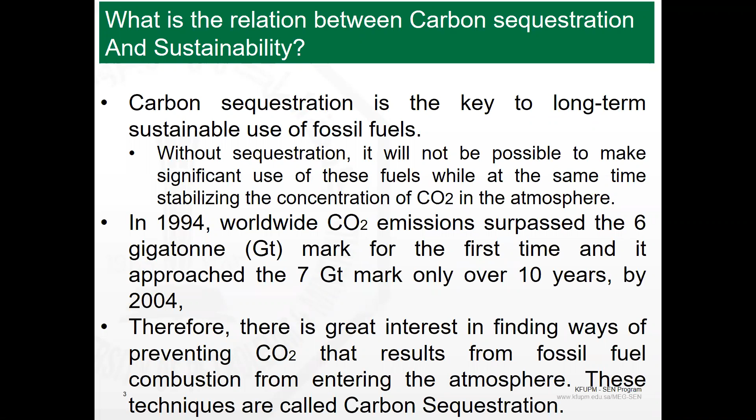So to have your power generation clean, or emission free, there are ways to help you burn fossil fuel and clean your exhaust. One of these ways is carbon sequestration, or separating carbon dioxide from the exhaust and storing it somewhere. We have two main categories for carbon sequestration.

One is direct or active sequestration. This is whatever humans can control to separate CO2 from the exhaust. If you burn a fuel with air, we have mainly nitrogen in the exhaust, plus CO2 and some water vapor. So how do we get rid of the rest to have CO2 alone? Because we need to compress the CO2 and dump it under the ground or somewhere.

This will consume energy, so I don't want to sequestrate nitrogen. Nitrogen is not harmful, it's part of the normal atmosphere. Why should I take all the exhaust, while most of it is nitrogen, and pay the energy to compress and sequestrate it in the ground, in reservoirs, as we will discuss? So separation is important. It will use some energy, but it will save the compression energy at the end.

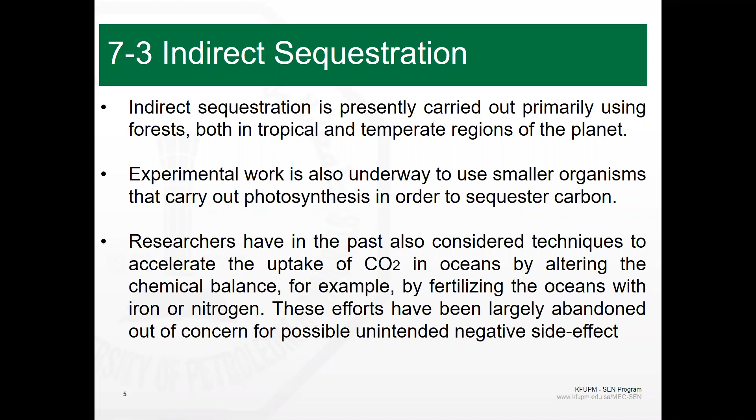For example, fertilizing the ocean by putting in iron or nitrogen, so when they put the CO2 in, it can react. But this alters the biological scene in the ocean, and because it has negative effects on marine life, they are stopping it or trying to find safer ways.

But forest-based sequestration is what someone was asking about. Now, if we produce more CO2, you can pay countries in Africa or places where you have forests, like Brazil, to help grow more forest to absorb CO2. I think this is going on in the US especially.

So forest-based sequestration can be carried out using afforestation, planting new forests. Especially over the last few decades, many forests have been deteriorated, cut, or removed for planting or normal agriculture. So what happened is you need to plant more forests, and this will cost you some money and also some energy, because you need to use fuel for transportation and preparing the land, and for plantation of large lands you will use some energy.

You might burn some fossil fuel to run your vehicles or so. So at the end, if you have a project for forestation, you need to see what is the net CO2 sequestration, because the plants will take time while you take care of them until they grow and become mature.

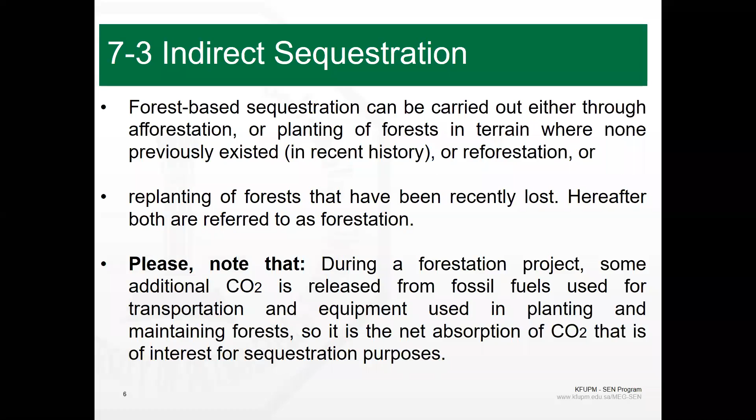All this time it is absorbing CO2, but still you are paying some effort and using transportation, producing also CO2. So the net calculation of CO2, how much this forest will sequestrate CO2, and how much you burn fuel and produce CO2, you as a project manager or a team have to calculate the net CO2 absorption to see how much is saved.

Actually, photosynthesis, this process, we learn about it since prep years and primary years in our schools. We know that plants take light and use the energy in the light to make a chemical reaction: you take CO2 plus H2O from the ground, some energy from the light, and the plant produces glucose, C6H12O6, plus some oxygen. This is the chemical energy balance equation.

So how much energy is needed by the plant to produce, or to absorb, 1 molecule of CO2? Let us see the numbers. The numbers here are from your book: it's about 9.5 times 10 to the power minus 19 joule per molecule of CO2. You might look at this number and find it very small to absorb 1 molecule of CO2.

Actually, if you look at how much energy comes from the sunlight incident on the Earth every day, you'll find it's a huge number.

But why is not all the CO2 produced by human activity absorbed by the forest or by the plants? Because there are many reasons, let me list some. Plant leaves absorb only light waves in the visible light range. The infrared or ultraviolet waves, which also have energy, are not absorbed by the plant's leaves. Also, the surface of the plant or whatever green area you have, that you are hoping will absorb the CO2 around it, is not uniform, it has ups and downs. Also, leaves are not organized in a uniform way, so most of the light actually goes to the ground instead of hitting the leaves or being absorbed by them, and most of it is reflected far away. So we don't capture much of this energy in the light.

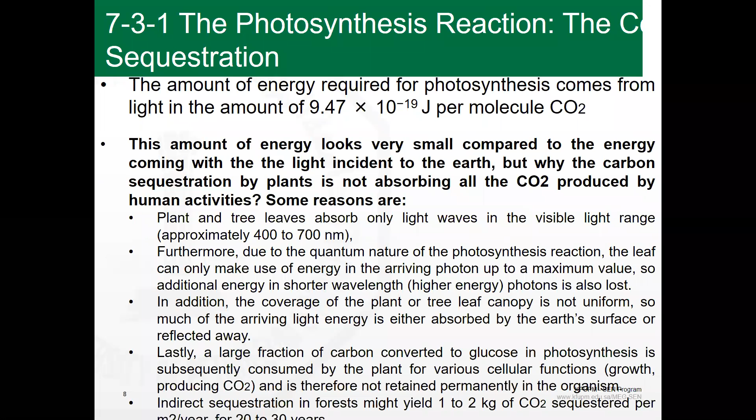Okay, so we need to know, as we sit here, each molecule of CO2 to absorb it, you need 9.47 times 10 to the power minus 19 joule per molecule. So if we have 2 kilograms of CO2, how many molecules does it have? We know that by volume, 1 mole has Avogadro's number of molecules, which is 6.022 times 10 to the power 23 molecules.

But we need to know in 2 kilograms how many moles we have. So we divide the 2 kilogram, this mass, by the atomic number of CO2, which is 44. You know how to calculate the atomic number for any chemical composition like CO2. We have C, it has 12 atomic number, and oxygen has 16. So O2 means 2 times 16 is 32, plus 12 for carbon, then it is 44 gram per gram mole, or kilogram per kilomole.

Then 2 kilogram divided by 44, how much moles we have, and then we multiply by Avogadro's number to give us the number of molecules we have. Then if we have this number of moles at 2.74 times 10 to the power 25 molecules, then we multiply by the energy required for 1 molecule of CO2 to absorb. It gives us 2.59 times 10 to the power 7 joule, or 25.9 megajoule. This is to absorb the 2 kilogram per year.

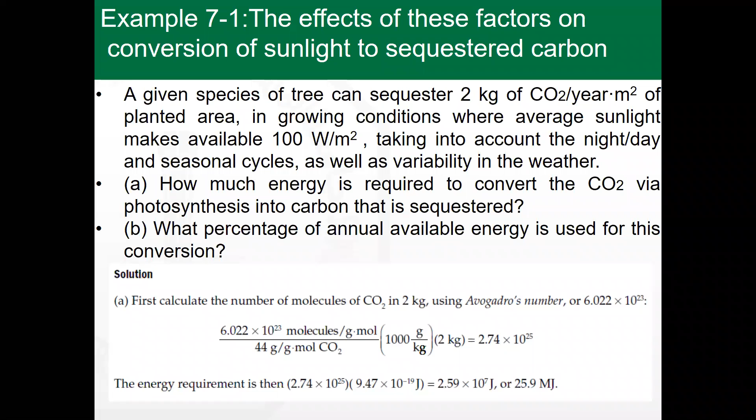To absorb the 2 kilogram per year, you need 25.9 megajoule. But how much energy comes to you per year? We have 100 watt per meter square, assume we are going to take, but we have per year, because this is the average per meter square. The average means he takes day and night, he takes the average. We know that half of the day we don't have sun, but he is giving the average number, that 100 watt per meter square. So we'll see how many joules per meter square. We multiply by the hour, which is 3,600 seconds per hour, and multiplied by how many hours per year.

It is 8,760 hours per year. So per year you have the incident radiation from light about 3.15 times 10 to the power 9 joule per year coming energy. But you need only from it 25.9 megajoule. We divide the numbers. So this sequestration of 2 kilogram of CO2 by these trees per year is 0.8%.

Hello? Hello? Any question? So if you are talking something outside the class, please mute yourself.

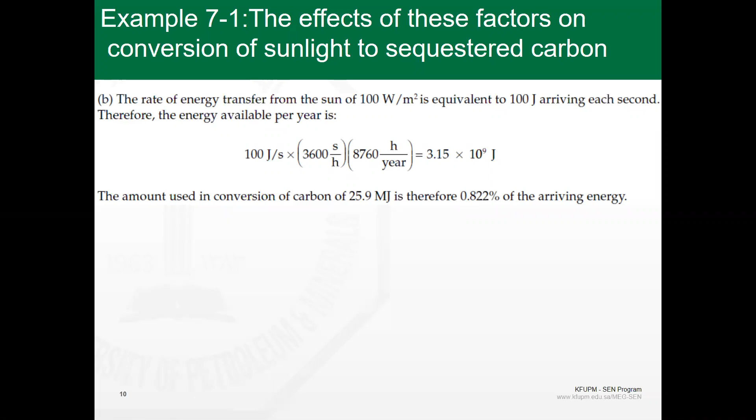Yes, Doctor. Yes. So this tree is utilizing less than 1% of the light coming to it.

As we know, this indirect sequestration, or helping planting the forest, is now being forced by government seeking to meet carbon emission reduction, and the non-governmental organizations that help or administer forestation on behalf of institutional and individual.

So the cost actually, if you already have a forest, might be $1 per ton of CO2 sequestration. But if you are going to plant the forest yourself and spend more money on it, then the rate is $20 to $30 per ton, which is really on the low side to sequestrate 1,000 kilogram of CO2. You need between let us say $1 and $30. This is still on the cheap side.

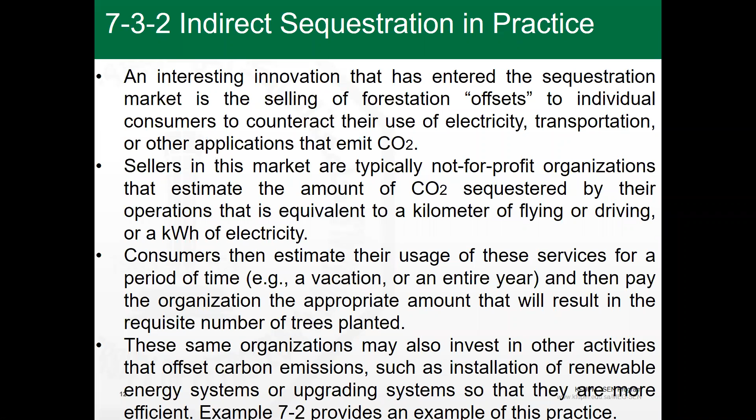This next example, example 7.2 in your book, gives an idea of a family that produces 400 kilowatt hour per month of electricity and wishes to buy sequestration offset from an organization that plants trees in Africa. The organization charges $19 per tree to plant it, and estimates that each tree will, on average, absorb about 730 kilogram of CO2 over its lifetime, which is about 20 years.

Electricity consumed emits CO2 at the New York State average rate based on the energy mix, classified around 2003. Given there is a table that depends on what fuel you are using, what source of energy, then we can estimate how much CO2 is produced per kilowatt hour.

So if this family is consuming 400 kilowatt hour, what is the CO2 emission for each kilowatt hour they are consuming? The organization allows consumers to purchase a fraction of a tree, like 2.5 or 1.5, so it's okay — they pay money, they don't really buy a whole tree. How much must the family spend to offset emission of 1 year?

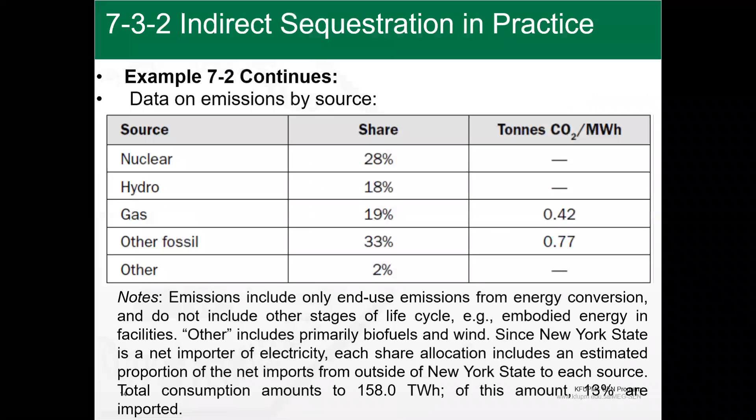But we are using annual consumption of 400 kilowatt hour per month — this is the question. 400 kilowatt per month, we multiply this by 12, so it will be 4,800 kilowatt hour per year, or 4.8 megawatt hour per year. Then the amount of electricity that produces CO2: we have 0.33 ton of CO2 per megawatt hour, and we are consuming 4.8, so multiply these two numbers, giving us 1.6 ton emitted per year.

So 1.6 ton — how much is the tree absorbing per year? It is 0.73 ton of CO2 during its lifetime, over its lifetime of 20 years. So if we are producing, this is what we are producing, 1.6 ton emitted.

So we divide 1.6 ton by 0.73, and we got 2.2, so we need 2.2 trees. Each tree costs $19. So we have to pay this to the country in Africa through the organization that is stated in New York, which comes to $41.68.

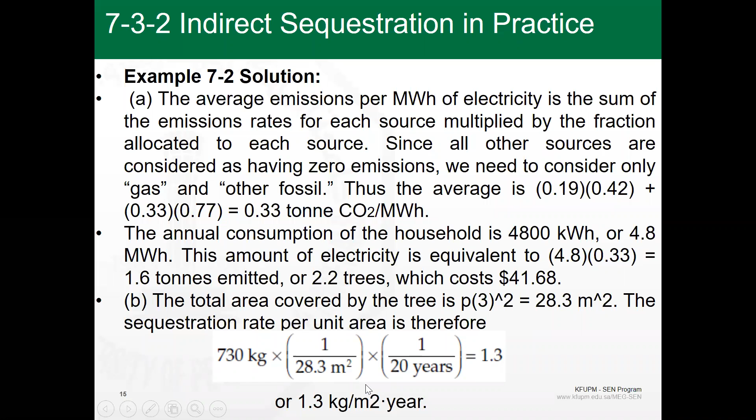So I divide by 20. So if I need it per meter squared, I divide by the area, or outer area, which he said covers the projected area. It has a diameter of 6 meters - this is of course the imaginary diameter, as if it is cylindrical in shape or a circle. So this shows how many kilograms of CO2 per meter squared per year is absorbed by this type of tree I will buy in Africa to offset my contribution to CO2 emission.

Now, for this indirect sequestration by planting trees, what is the future of it? To wrap up and summarize, it is clear that indirect sequestration is a straightforward, economically viable option for sequestration.

Even if your country doesn't have forest, you can help another country. I think with time, because the globe is becoming like one village and we are affecting each other, especially with emissions, it's not limited to one country. I remember maybe 10, 15 years back, Europe was thinking to buy electricity from the Middle East instead of buying the fuel and burning it in their own power plants, through connecting the electric grid.

So if, for example, we produce electricity here because we have fuel, and then export the electricity, this doesn't prevent the emission that goes to Europe, because it's produced here but spreads everywhere, right? So there are some challenges. The world now should help each other. This is what I want to say from that example.

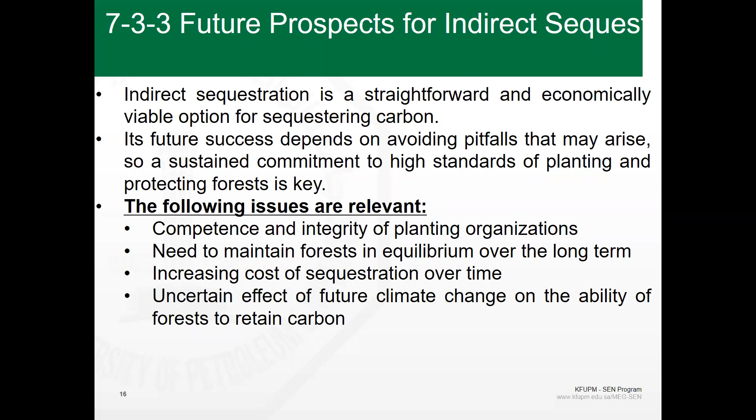These debatable things are not clear because it needs research - you need to record data. Before our current time, we don't have enough data recorded to trace this. I will stop here for the first session, and I would like to see if you have any questions.

Otherwise, I'll start this. Yes, please.

Yeah, last sessions we took some thermodynamics lessons, the Brayton cycle and Rankine cycle. So now we jump to carbon sequestration, which... We didn't jump. Actually, last time we talked about combustion techniques that will help us to separate the CO2 because, as I said, your main program is sustainable energy, right? That's why we have this course that talks about sustainability from different angles.

One is increasing the efficiency of the production or conversion of energy from conventional power plants, where more than 80% of the power produced is from fossil fuel. I mean, here in Saudi Arabia, so far it is almost 100%. You produce energy from burning natural gas and oil, isn't it? So we cannot focus now on renewable energy. Of course, we are preparing you for the future, but nowadays you have to do something with what is on the ground.

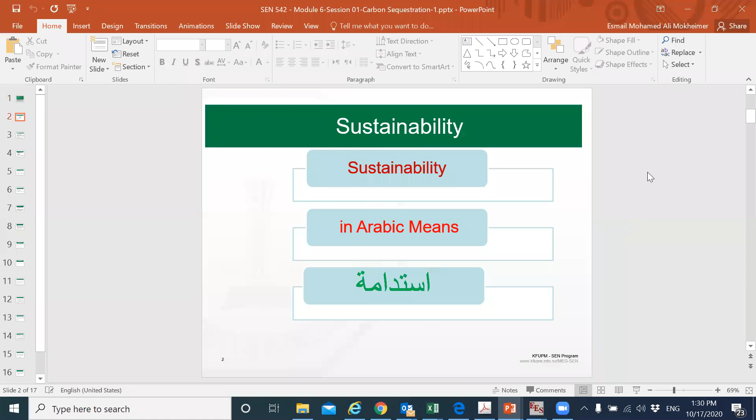And at the beginning of this lecture, I don't know who asked the question, did he come late? I put this here: what is the relation between carbon sequestration and sustainability? I started my lecture with this. Were you here when we started? Because your question was related to this slide actually. Did you come late? Who asked? No, I was. Can you please clarify your question more, because I didn't get the question.

I think from my side the relation between the topic we are discussing and power plants is clear, because mainly we burn fuel there. And also this is my research, in line with my master's and PhD students. So the relation is very clear in my mind, but I want to understand your question more to see where you are from the picture I have. Can you please repeat the question or rephrase it?

Yeah, Doctor, you clarified it, but my question arose because we take this course as part of mechanical, then we talk about carbon sequestration, which is a technique. So that raises some questions from my side about the exam. Will this part also be in the exam? Yes, at least if you are worried about the exam, maybe I will give a short essay question, or a question like the one we discussed about the offset of CO2, or how much CO2 is absorbed by a tree or something.

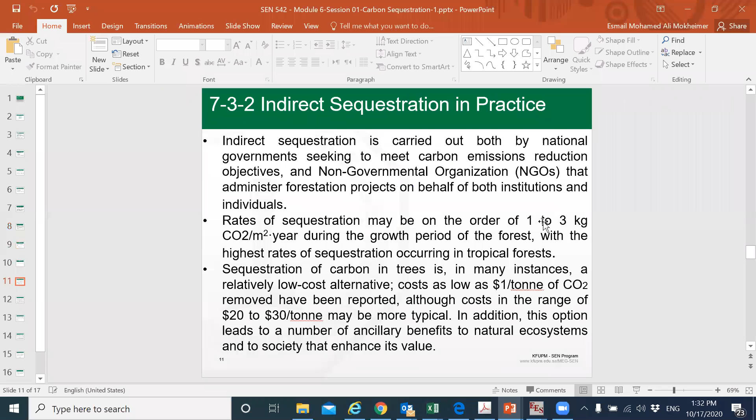This type of example 1 and 2 might be a point, but this is not the only issue. We are talking about different ways to make the combustion clean, right? Or the power plant environmentally friendly. Why do I want my power plant environmentally friendly? To make the country leave my power plant in operation, yes, right? Otherwise they will shut down my plant if I am exceeding the limits, or I will pay more taxes that will reduce my profits, right?

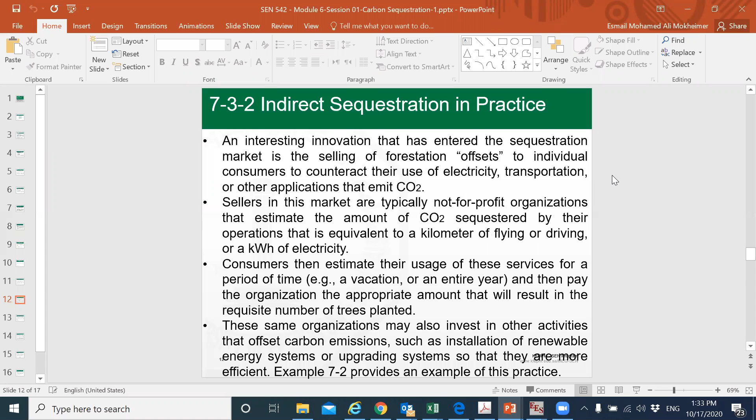But as a country, we are responsible now for our globe, aren't we? We are responsible for the problems that affect not only my country, but other countries, right? We are affecting each other, as I said. Yes, yes. So these types of questions are important.

But again, I said at the beginning of each lecture, I will try to make a link between what we are discussing and the main objective of your master program. It is sustainability. Of course, even the program now is sustainability and renewable energy. I'm not sure if it is the official name now. We discussed earlier changing the name to sustainable energy only. Now it is sustainable and renewable energy, both.

Because introducing renewables is part of the contribution to sustain our source of energy, to make it continue for a longer time for us to use it. That's why, first of all, we use it efficiently, and using it efficiently also helps us use it in an environmentally friendly way.

We have attended with you, and this is the third session and one office hour. Yeah, of course, I'm willing. Actually, the first office hour I think we delayed because you were preparing for your exam with Dr. Hunter, but I'm willing to give any office hour you want. I am free. I have more time now, alhamdulillah. So at any time, but the first one in the first week, you remember, we had an exam. It was delayed because of the exam, not because of me.

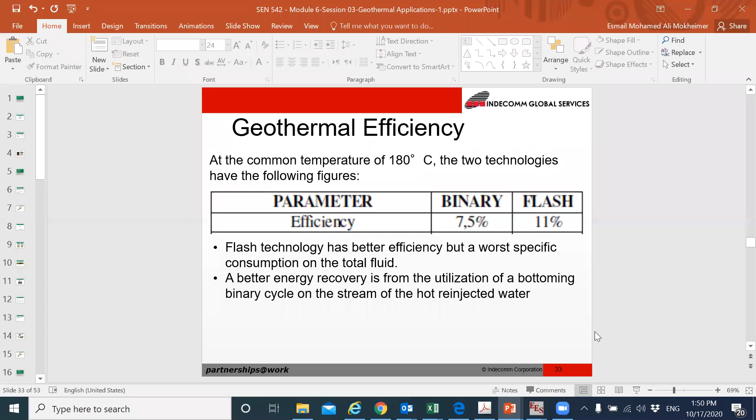Yes, Doctor. Yes. Actually, this is again a continuation of carbon capture. This will close the issue of, I think, conventional power plants, because we are going to start, in the third session, the renewable energy part. Before I go to this, actually the questions you are raising, like what is the relation between what we are discussing and sustainability or the main program, and also how the elements inside each module are integrated to each other, are also important questions.

Because you need to know, as a master student in that program, what are the main objectives, why these courses are there, how they are helping me. Actually, the global picture is that a graduate of this program should be a leader or decision maker or manager in the energy sector. Maybe after a few months or few years, you will make major decisions that affect your company or affect the country, right? Depending on what your position will be. What we are preparing is an engineer who will be a decision maker in the energy sector.

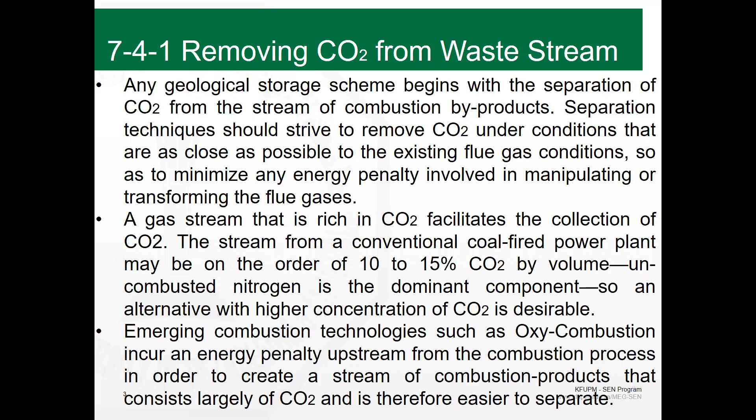Maybe we add CO2 to it, a sort of CO2 circulation. The oxidizer now is a mixture of oxygen plus CO2. Then we burn the hydrocarbon and produce CO2 plus H2O. I can cool the exhaust gases to condense the water, having it liquid, and then I have CO2, which I compress and sequestrate.

These are emerging technologies, but they have a cost, of course, to separate oxygen from the air. With this oxy-combustion, you need to modify your combustion system - you need to add a plant for air separation.

The other way is to leave your plant as it is and add an exhaust gas treatment step. As I said, by chemical looping, you have chemicals that absorb CO2 and leave nitrogen alone, which you get rid of. Then you have the solution with CO2 dissolved in it, and you heat it again to take the CO2 out as a gas. There is no chemical reaction with the liquid - it's just physical dissolving at low temperature and separation at high temperature.

So here you pay some energy circulating the liquid between the two containers, and also in heating the solution of chemical and CO2 - you need to heat it, which costs energy. Also, when you put this system on the exhaust of the gas turbine or combustion chamber, you add a pressure drop or friction resistance that reduces the power output from your plant. So there is always a penalty when you add carbon capture technique.

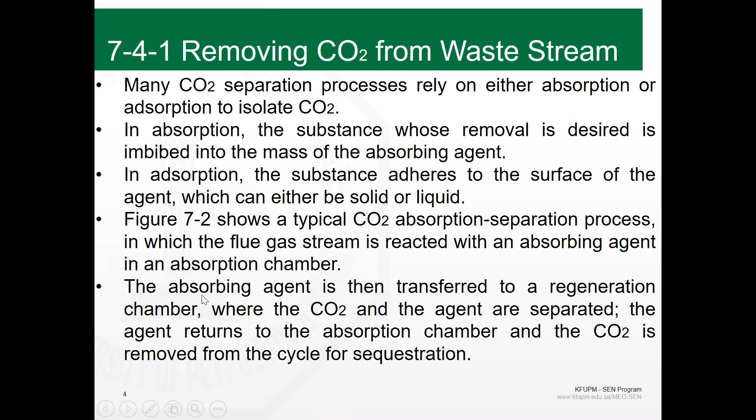Let me show you one of the examples I gave last session. Let us look at it more closely.

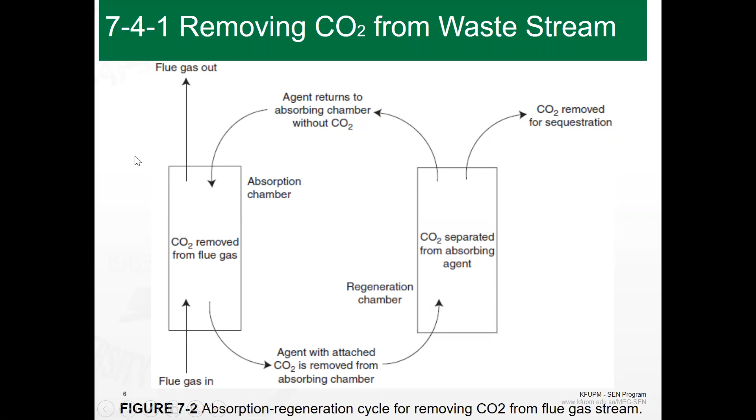Is that a new thing in the plant, or has it been available for a long time? The chemical looping is known for a long time, but nowadays you need to install it. I mean, you need to add it to your plant. If you don't have it, you will add it, right?

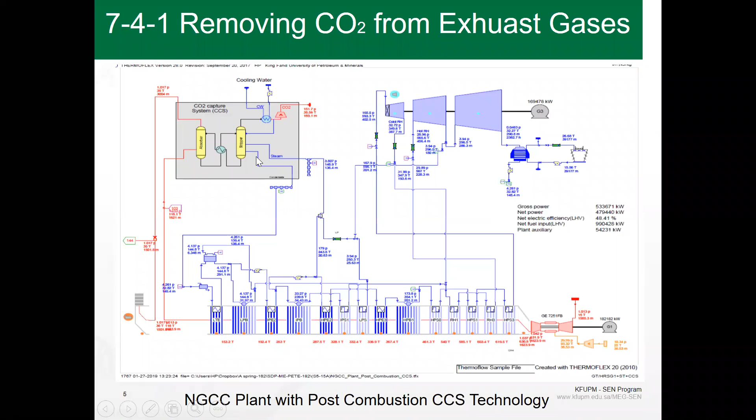Like oxygen separation, the new technology or the other technology we have. This oxygen separation is known for a long time because in all hospitals you have oxygen bottles, right? From where do they get it? From the air. You have a factory, like many factories around us in the eastern province. They compress the air to very high pressure, then cool it to a very low temperature, so it becomes liquid, a mixture of oxygen and nitrogen as liquid.

Now you heat them again slowly, so the nitrogen will boil at a different temperature from the oxygen. You separate them and take the oxygen in a bottle. Maybe you release the nitrogen again, or take it for another industry, like the fertilizer industry. This technology of oxygen separation from air is known for a long time. But now they introduce this into power plants for pre-combustion, to separate CO2.

How is this? When I burn any fuel, which is CxHy, I burn it with air. Air has oxygen and nitrogen, isn't it? In this combustion, CxHy plus oxygen plus nitrogen will give CO2 plus H2O plus nitrogen again, because nitrogen is inert, it doesn't react unless we have NOx. So mainly, you can separate H2O from the product by cooling, as we did, and separate nitrogen.

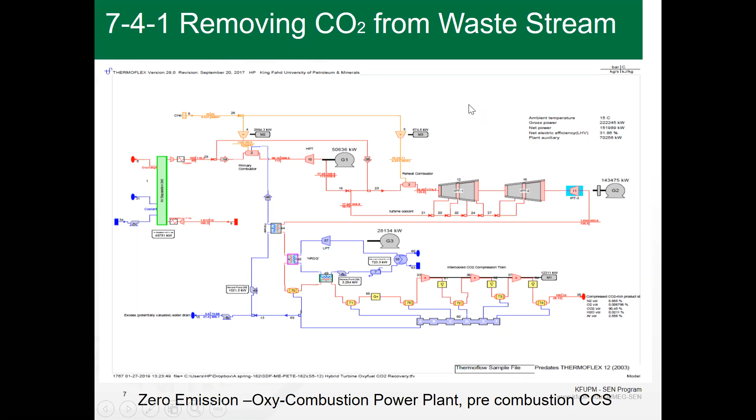There are other ways for direct sequestration. If you have an industrial area with CO2 coming from many chimneys, and a windy place, you can design a sort of duct in which this wind or stream of CO2 plus nitrogen goes into the duct without really needing a compressor for suction. Then you make the separation by chemical looping, and then you need to raise the pressure of the collected CO2 and inject it into the ground, into the reservoir.

What I want to say is, why not take the exhaust directly, all of it? As I said, if I have 100 cubic meters of exhaust gases, maybe 90% or 85% of it will be nitrogen, and the remaining is CO2.

When you compress all this exhaust, you need to pay energy and money, including for the nitrogen that you don't need to store. So it's cheaper to first get rid of the nitrogen, and then you have almost pure CO2. Now you're forced to pay energy to raise its pressure, so you can compress it down under the ground.

Now, some companies or ideas propose using this CO2 since we're trying to store it under the ground anyway - why not use it for enhanced oil recovery? As I told you, maybe in the help session discussion, we have enhanced oil recovery. What does enhanced oil recovery mean?

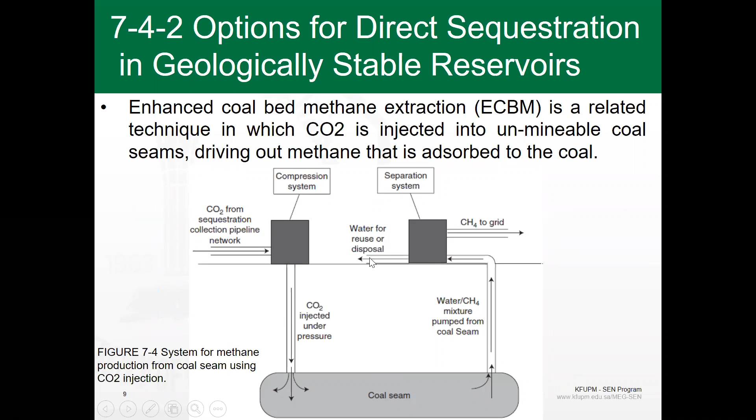These are ideas for how to do sequestration while at the same time producing more fossil fuel. This is used in some places in the US with this technology of enhanced coal bed... reservoirs. You need to just get an idea of how much CO2 you can sequestrate.

You can, here in this reservoir in San Juan, sequestrate up to 1.4 gigaton. So it's huge, but it also has a cost.

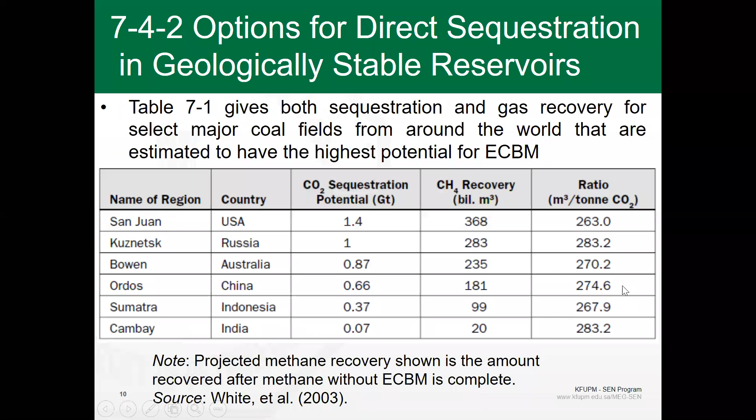The conversion rate of the field is from this table - in Indonesia, this is the sequestration, this is the recovery, and the ratio is 267. We use this to find out how much methane we'll get. This gives us the energy produced from the methane, and at a price of 10.5, the value of the gas output is about 720 million per year.

If you use this CO2 to inject it into a coal mine, you will produce 720 million dollars worth of gas or methane per year. But of course you will pay costs - to transport the CO2 from the power plant to the coal mine and inject it, you need compressors. So you need to see what the net profit is.

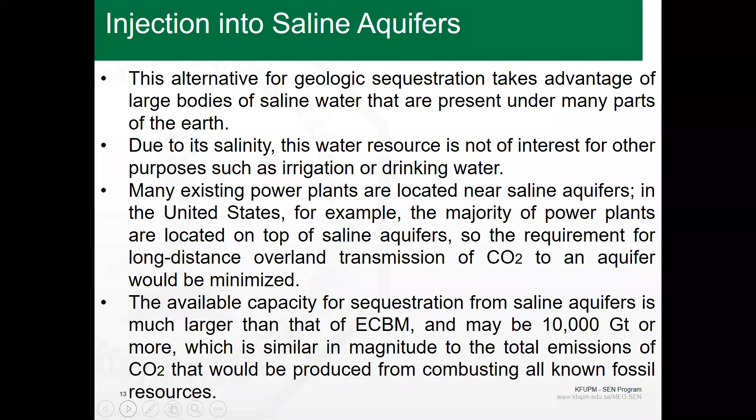Again, injection in saline reservoir: like you inject in these coal mines, you can inject in a saline reservoir. Why in a saline reservoir? Because saline water is underground water that is not useful for irrigation unless you have a desalination plant, and that also will cost you. But let us say in the US, there are many saline reservoirs; they inject CO2 in it, and CO2 reacts with the saline water.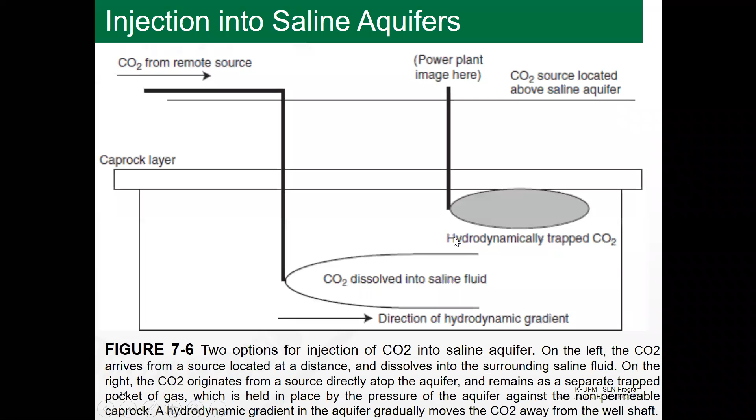Then you will have the CO2 like bubbles, hydrodynamically trapped gas inside. But again, this is the sort of analysis. If you have in the aquifer some porosity phi, and the volume of the aquifer is V, and how much of the water is saturated from previously injected CO2, then this is the volume of CO2 you can inject in that reservoir.

Of course, since CO2 is an ideal gas, we can say number of moles equals PV over RT, and then we can substitute here how many molecules by PV over RT. So just a quick example here.

Sequestration in literature suggests $0.01 per kilowatt hour may be feasible. This example says for the supercritical plant in example 6.8, which is an efficient power plant but also has combustion, you produce CO2. CO2 from 15 such plants is piped to a saline aquifer where it is injected. The aquifer is approximately 1,000 kilometers long, 500 kilometers wide, and average depth of 1,000 meters.

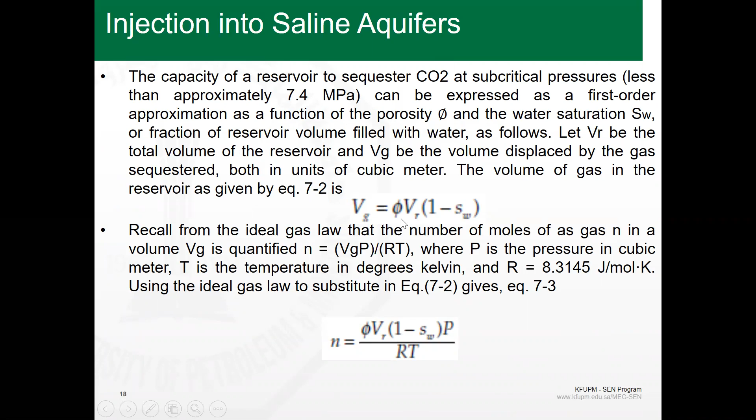And it says the pressure in the aquifer is 500 kilopascal on average, and the temperature is 325. If the plant functions for 75 years, is there sufficient capacity in the aquifer to sequestrate all the CO2?

To answer this question, we need to know the rate of CO2 production from example 6.8. So we refer back to it and get how much megawatt hour is produced per year, and then we translate it to CO2 emission, because we have a relation for how much CO2 is produced per megawatt hour. Then we substitute this CO2 production per year in the equation and get the number of years, using the volume of the tank.

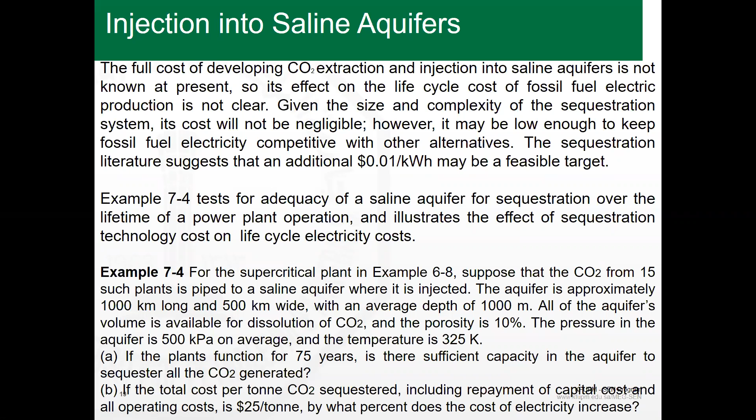Then he's saying if the total cost per ton of CO2 sequestrated, including repayment of capital cost and all costs, is $25 per ton, by what percent does the cost of electricity increase due to sequestration? Because sequestration needs transportation, compression; these are all additional costs.

So the solution: we got the volume of the reservoir, which is 5 times 10 to the power 14 meter cube, times the pressure over RT, times 0.1, the porosity of the reservoir. So you have 9.25 times 10 to the power 15 moles. At 44 grams per gram mole of CO2, this converts to this number of tons.

And from example 6.8, as I said, the plant generates 1.47 million tons per year of CO2. So for the amount of CO2 generated by 15 plants over 75 years, we multiply this number by 15, and then times 75 as well.

Then there is adequate capacity, because you see how much is the volume of the reservoir. And this is the additional cost. If you have how many tons, you multiply this by $25, it gives you the cost, $36 million per year for sequestration. Then spreading this cost among 3.07 billion kilowatt hours generated, then you add this.

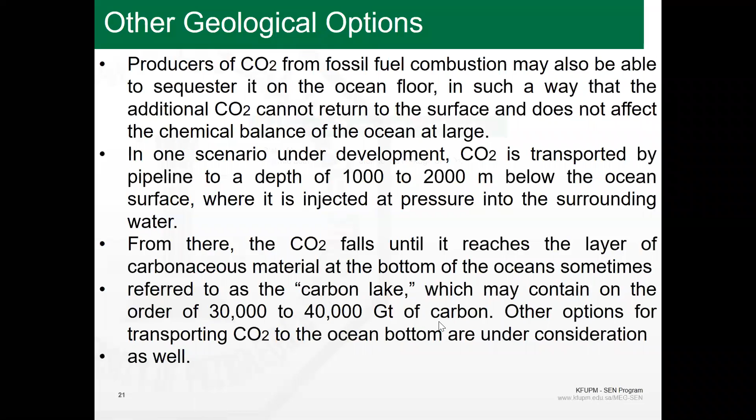So we have this risk always with carbon capture and sequestration underground or under the ocean water, like risk of leakage. If this CO2 leaks back to the surface, it might be in huge amounts, and then we are actually making an adverse effect on our globe. Also seismic activity: when you store mass in a reservoir that is empty, you might create some risk of earthquakes. Then if you have earthquakes, you might have some cracks, and these cracks might lead to leaking of the CO2 you stored.

But also there is an important issue. I think our friends in Earth Science and the Petroleum Department are studying it, because when you inject CO2, even for oil recovery or just for sequestration, this CO2 might react with the material in the cap rock shale of the reservoir. It has a cover from, I think, sandstone material, I don't know the detail, but it can react. Our colleagues are studying how this CO2 will react and how it will affect its strength or ability to sustain earthquakes or something like this.

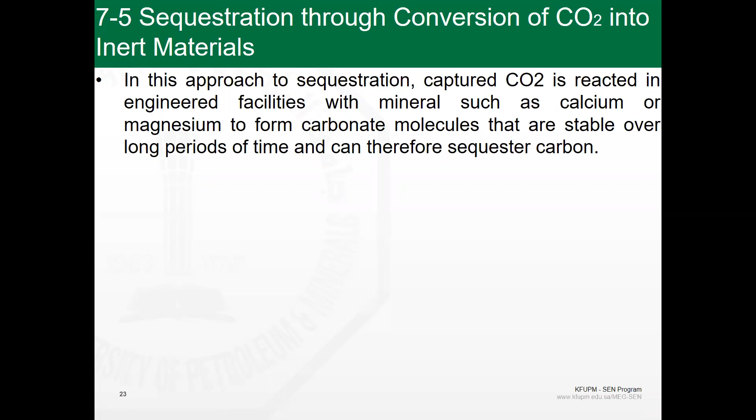Before I leave this, the option is to convert CO2 into a product. SABIC is having some project to convert CO2 into plastics. There are some technologies under development, SABIC is trying to push this. Also, you might convert CO2 into fuel by a process similar to photosynthesis. I think we have Dr. Gondal in the physics department trying to do something like this, to convert CO2 into fuel.

So I will stop here. Again, this is sort of a descriptive lecture, but it has some simple numbers, just to have a rough estimation of the cost due to sequestration, how much if you use indirect by trees, or by chemical looping, or by sequestration in aquifers. This type of question I might integrate in a question to compare this to that, how much is this cost, how much is this cost.

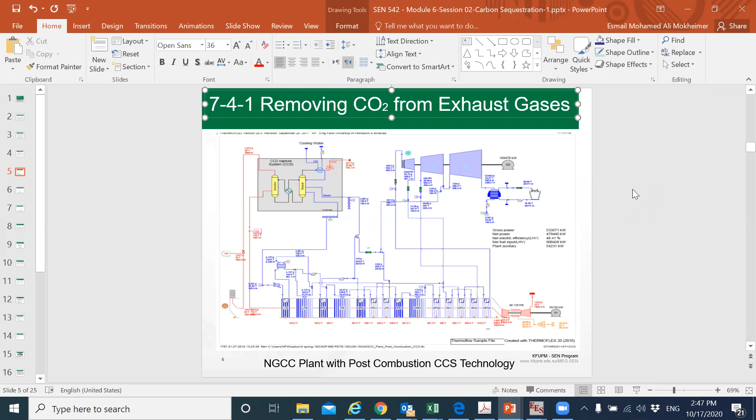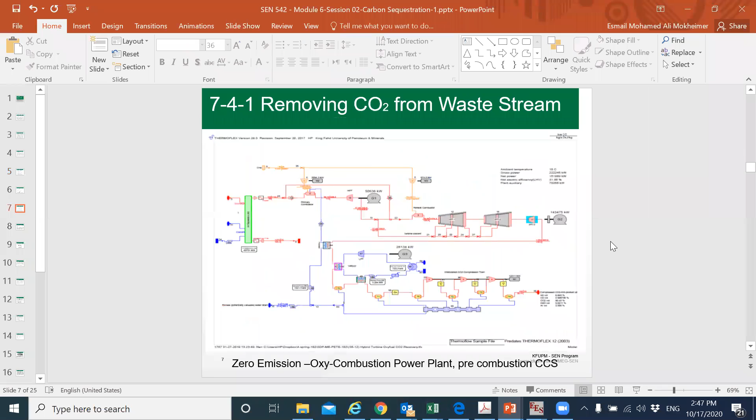Doctor, I'm not looking for something very long. Sometimes a 2-minute video will be more clear and will deliver the idea faster than maybe 100 slides. I try to get these cartoons or drawings to give you a quick idea, but again, videos of 1, 2 or 5 minutes, I'll share the links with you. Sure, doctor. Thank you very much. Okay, you're welcome.

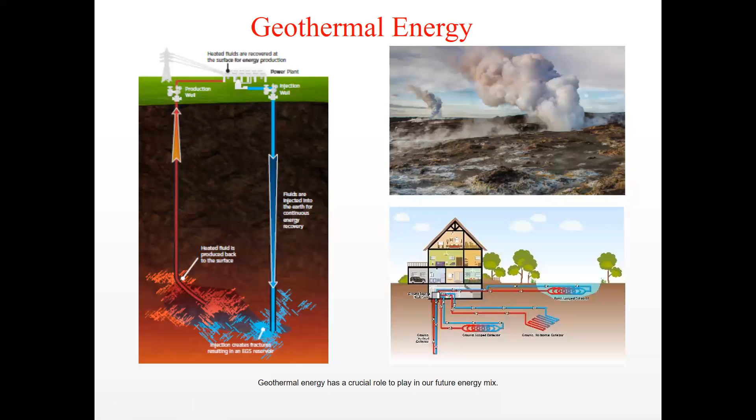Always try to remember: the coefficient of performance of Carnot for heating or cooling is T-high over T-high minus T-low, or T-low over T-high minus T-low. So T-high minus T-low gives you the coefficient of performance. The efficiency is 1 minus T-low over T-high. Whenever T-low is really low, you raise the efficiency. This is a quick analogy.

So in air conditioning, do you know how the air conditioning cycle or refrigeration cycle works? Compressor, condenser, throttling valve, and evaporator. Do you remember the window air conditioner?

The window air conditioner, what does it have? It has two coils, like the radiator of your car, one outside the window, one inside the house, right? And the compressor is there circulating the refrigerant in between.

So when the compressor rotates, it creates suction at the inlet, low pressure, then we have the refrigerant at low pressure, low temperature. It's pumped by the compressor at high pressure into the condenser, then you have the refrigerant at high pressure, high temperature. Then you throttle it back to low pressure, low temperature, and the cycle continues.

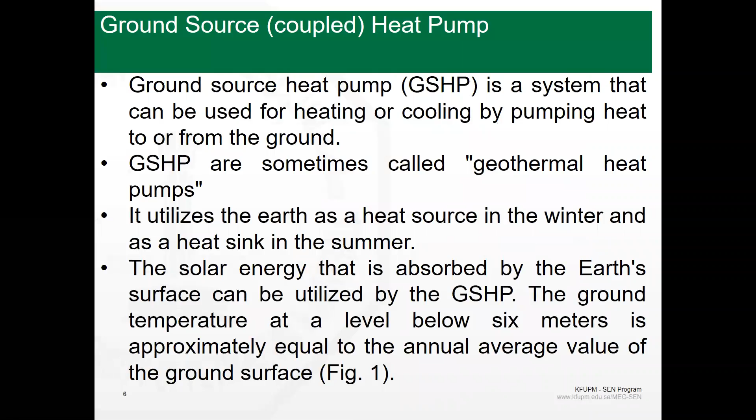Let us focus on the cooling. When we cool our AC unit by air, we consume more power, but if we cool it with water, we consume less power. That's why in central air conditioning you always see a cooling tower. The cooling tower is actually cooling the water, and this water is cooling the condenser. You have a loop that cools the condenser by the cooling tower, to cool the water that cools the condenser of the compressor.

I'm talking about central air conditioning that is 1,000 tons of refrigeration compared to 1 ton or 2 ton of your window type. So in the university, you have many central air conditioning systems with many cooling towers.

Now in a place like Rashid Mall or any big mall, when you have central air conditioning and you are cooling it with a cooling tower, the cooling tower needs a ground to build on and takes up space, isn't it? In addition to the cost of building the cooling tower that cools the water, which then cools the condenser of your AC unit, this area or ground in a place like Rashid Mall - if you have a shop on it, you can rent it for more money, isn't it?

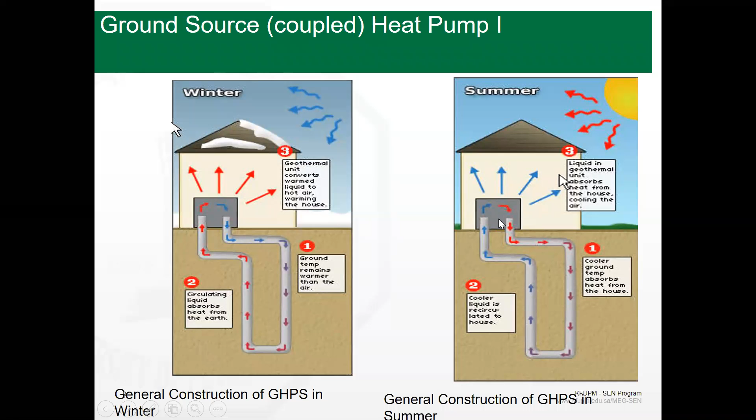Here in summer, we reverse the cycle, and now this loop is dealing with the coil that works as evaporator. Sorry, as a condenser. Here it deals with the coil that works as evaporator in winter, but this same coil will work as a condenser. I'm talking about this coil. This coil can work as evaporator in winter. It takes heat here and dumps it to this.

And in summer, we reverse the connection. So this will be the evaporator and this will be the condenser. We dump the heat down.

So this is one vertical type, but we might have the heat exchanger coupled to the ground. Since we said 6 meters, this usually I need up to 10 meters or even sometimes 5 meters if you have a villa like this. Inshallah, all of you will have a good backyard or front yard. You can have this loop that has the water that cools or heats the coil, connected with the coil in your air conditioning system. You can have it horizontal in shape like this, so you don't need much

money to drill a deep well, because drilling cost is very high. So the drill, this is called vertical loop heat exchanger. This is horizontal, this is called the slinky. The difference between each one of them: the vertical one, you can go deep up to 100 meters or so. It will take less space, but it will take a lot of cost to drill, because drilling here in Saudi Arabia is very costly, especially most of drilling companies put their prices for the oil companies.

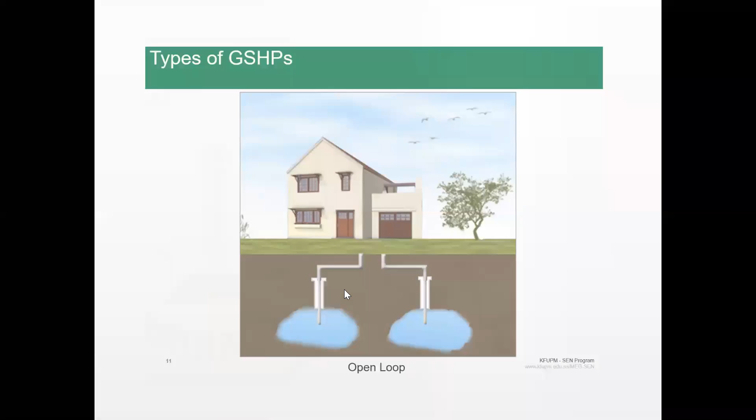We built one, and actually the maintenance director came and he insisted not to dump water here. We made sure that we show him that we have this type, that is the U-tube. So we don't dump any water inside - it's a closed loop. The hot water will come down, lose its heat to the ground, and then we take it back as cold water.

Actually, we were pumping water here at 45 and we take it out at 32 to cool our condenser at 32. The efficiency, or improvement in the performance, was around 35% saving in the energy. This experimental work we have done by ourselves, but the drilling cost was very high, so it was not feasible economically due to the cost of drilling.

And we used the closed loop because this was the aquifer of water used by the university, so the maintenance wanted not to contaminate the aquifer. But here, if you have a saline aquifer, or you guarantee no contamination, or it is your house, you can have the open loop. Of course it might be cheaper, but sometimes you have even underground water that is flowing - it will take the heat and travel.

But if you have a rocky place, with time in summer you dump the heat down in the ground, and in winter you suck the heat - this is if you use the heat pump. But usually in our places the summer season is much longer than the winter season, and also Q high is always higher than Q low. So using the heat pump with the rocky place, there's always the possibility that it will not work after a longer time, 10 years, 15 years. It depends on the heat transfer characteristics in the ground, because you dump heat more than you suck the heat in winter.

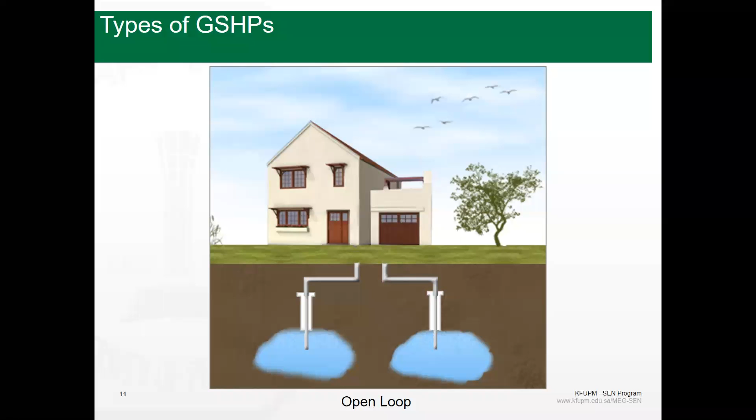Or some people use it only for cooling - we don't really have a winter season. So if you keep dumping the heat and it is not dissipated around your coil, then the temperature of the ground may rise up over years. So the solution is to use a heat pump that dumps heat in summer and takes heat in winter, to try to balance the temperature of the ground near your house so it doesn't increase much.

These are different constructions of horizontal types. You can have a trench with one pipe, like this, one layer here. Or you might have different layers above each other with distance between them, of course, like this.

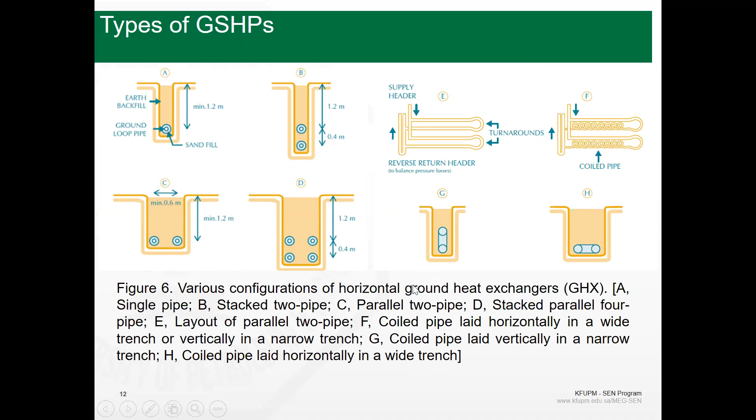Anyway, you can have different arrangements. For vertical also, you can have different arrangements. Actually, this is the main component. This is the ground coupled heat exchanger. This is our AC machine that is connected to a coil. This coil might act as evaporator in winter or condenser in summer, depending on how I press the reverse button

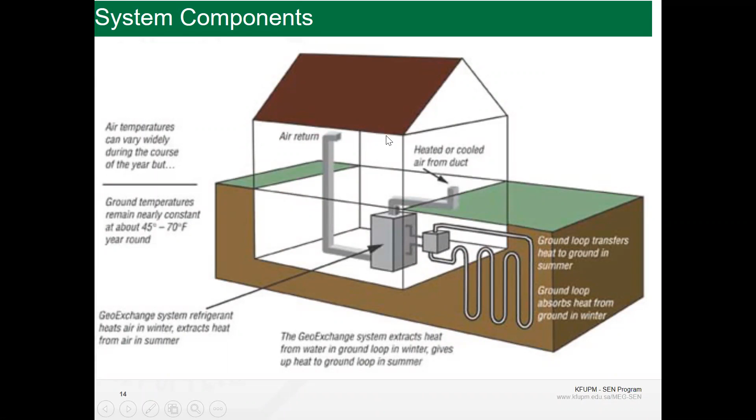for cooling or heating. And of course, this is the air that is circulated in the house, this is the supply air and this is the return. Actually, this is again repeated, this is heat pump heating.

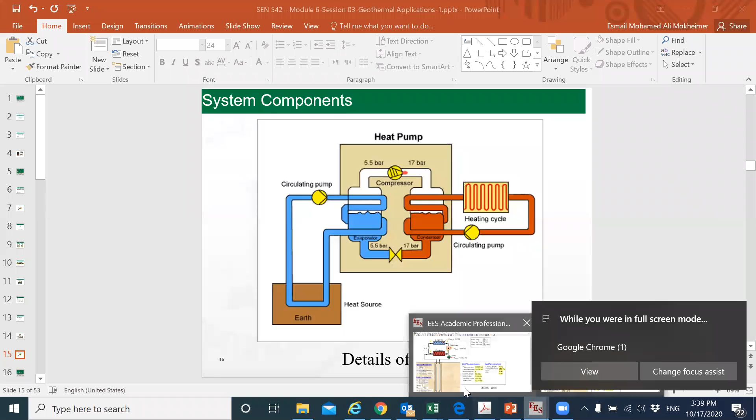Actually, we have one EES software that we developed with one of our students at the time, Dr. Sharqawi, one for designing the heat exchanger, how much is the diameter, how much is the length that we need to dump heat, for example. We have two. One is the design, one is the rating. The design is that we say that we need, for example, 10 ton.

Let us say the ground properties. These are input data, that we say this is the outer temperature. Let us say if I wrote here, instead of this, I wrote 49, then I'll see how this dimension and the cooling capacity will change.

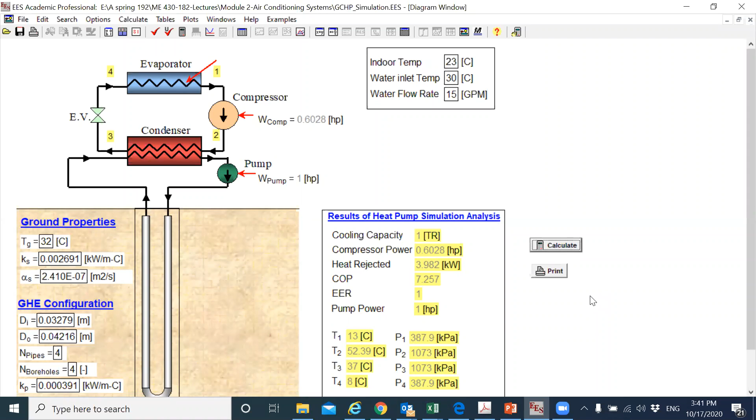I should say, and I don't know why it didn't work. Maybe this is high. Yeah. Let me make it 30 only. Oh, it doesn't work. EES is not working outside the building. Sorry for that. Yeah, it's the same EES program, only used.

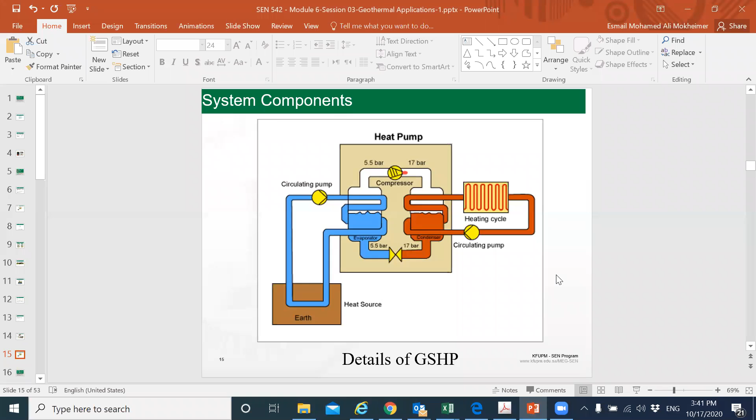Okay. But anyway, we developed software to make the design of a vertical loop. Now for deep geothermal, I want to go faster here to give you the concept of how I use the heat trapped in the ground to generate power. Is there any question in geothermal, how it is related to air conditioning, how I can use it to make my AC unit perform better or use less power from the compressor to give me the same cooling or heating effects?

How better is using the heat pump rather than an electric heater? Is this clear? These concepts are clear? Hello? Yes, Doctor. Right. Now, as you know, if you look at the Earth's structure, the surface crust of the Earth has the temperature of the surface.

But when you go deeper and deeper, you will find the core of the Earth is maybe at 6,000 degrees Celsius, like the surface of the sun. I think our planet is part of the sun, but the core is very hot. And when we go to the surface, we have the normal temperature. So if we dig 1 kilometer, 2 kilometers, we will find the temperature, as we said, for 10 meters, the temperature is almost constant, around 32 degrees in this area. In Europe, it is 6 degrees, the average between minus and plus at the surface during winter and summer.

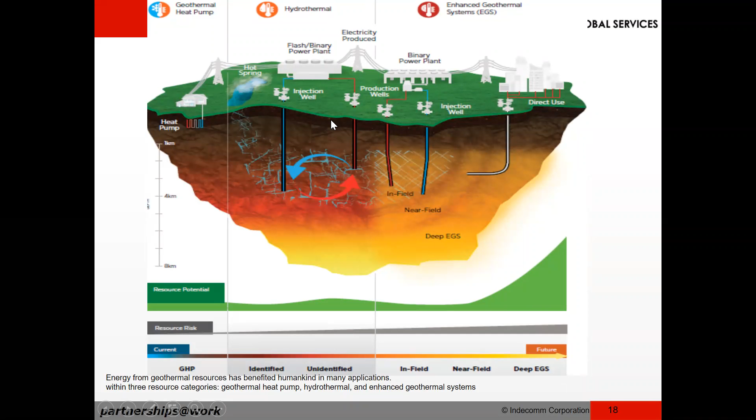But actually, if we drill more, like these oil wells can reach 1,000 meters, 2,000 meters, I mean 2 kilometers, 3 kilometers down to find the oil. At that depth, the temperature is high. So in some places you have a hot aquifer down, so you just drill deep, then you get hot water or sometimes even steam coming out. In some places these hot springs are available, like in Harra near Medina and Al-Lith and Jazan. You do have the hot water even coming up.

So just to preview the geothermal applications, we have the shallow geothermal technology that is using the ground coupled technology. We can use this for air conditioning applications, for heating in winter and cooling in summer. For deep geothermal, we need the deep geothermal source. We need the drilling. We need the production and enhanced. So I'll tell you what an enhanced geothermal source is. But mainly, we have shallow geothermal and deep geothermal.

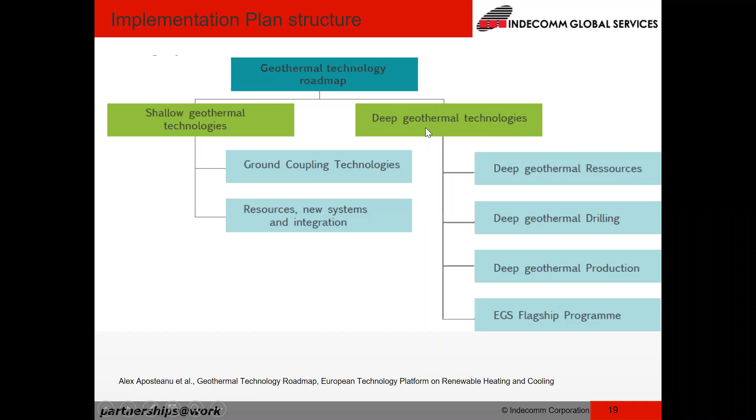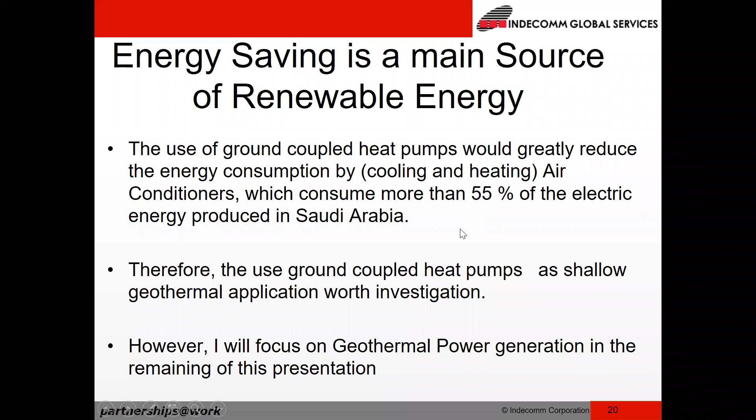Actually, this lecture I prepared for KACARE a few months back. So the energy saving, as I said, we use it for air conditioning and improve the performance by only about 1%. You can't imagine how much electricity you are going to save in Saudi Arabia if we look at air conditioning that consumes 55% of all the electricity we produce. Now, this is some structure from geological people they gave to us.

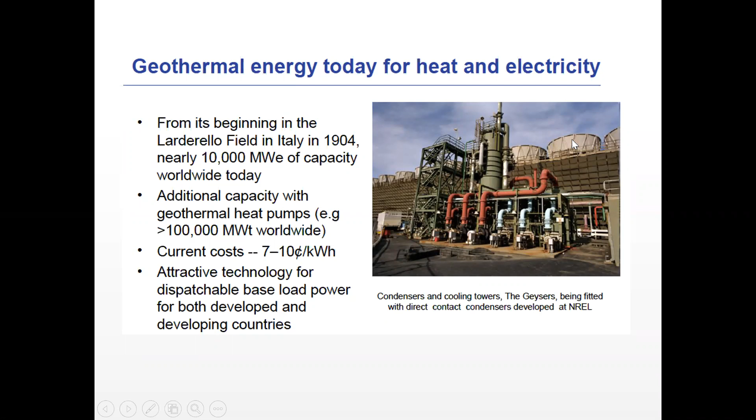You know, usually geothermal is linked to the Rankine cycle, since in some places you have a hot aquifer deep in the ground. So you can dig and you find steam and take it to rotate a steam turbine, then condense it to dump it back, or you throw out the steam to the sun. But this is the Rankine cycle, and this is the cooling tower. You can see, to cool the condenser of the Rankine cycle.

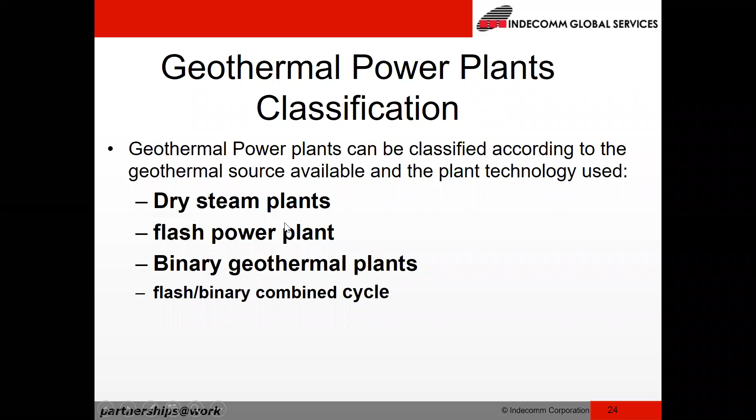So what are the classifications of geothermal power plants? We have dry steam plants, flash power plants, binary geothermal, and flash plus binary. For each one I will give a quick explanation of what it is. The dry steam, you just take the steam, dig down in the ground. Maybe 2 kilometers down or 3 kilometers down, you will find the steam coming.

This has the advantage that it's a simple cycle. You just have the connection to eliminate any liquid, so as not to hurt the turbine, and the exhaust to the atmosphere. You have only a turbine and plumbing. So what is the cost? It is the drilling and the turbine cost, and of course operation. But the steam coming from the ground, you pump it, and under its pressure it goes out through the turbine.

The disadvantage: if this aquifer that is underground is contaminated with radioactive material or whatever type of contamination under the ground, maybe you have some chemicals, any poisonous material, then it might harm the environment. If it is not harmful, fine, you let it loose. But with time, this ground water will finish. So sometimes you need to condense this water and return it back to your reservoir because the rocks are hot down there. So you want to sustain this geothermal source for a longer time.

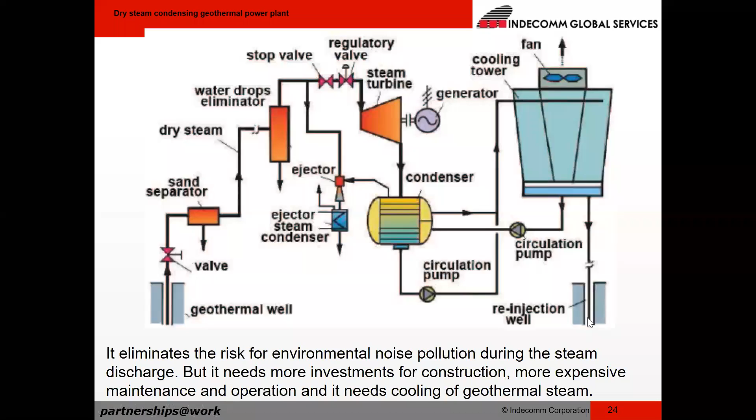And you know the concept of a cooling tower, that you take the water here, push it as a shower, and then suck the air by a fan. Then the cold water will condense it and you can inject it back. I mean, from the condenser, you can take this and inject it back to the aquifer. So this is the geothermal production well, and you have re-injection. So this is to keep the water instead of losing it.

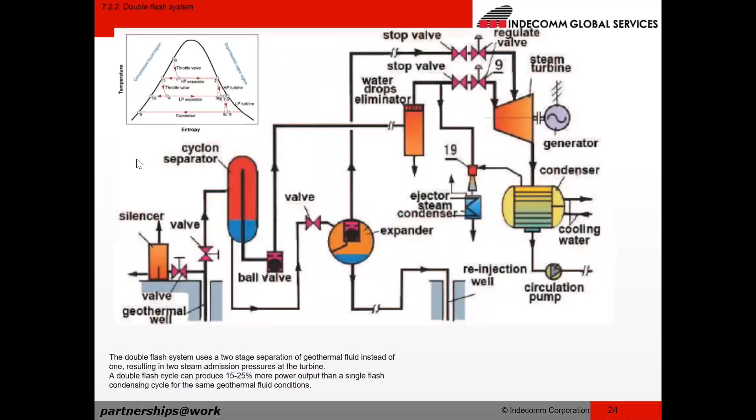Okay. Doctor, what is the use of the ball valve here? Whatever the details here, it is just general. Yeah, it's a valve, it's a control issue, because you need to control how much steam is coming to your turbine.

You don't need to actually put it here; you see here the steam coming from this pipe. You put the pipe at the top and then only steam will come here. Liquid will be coming here. So steam here should come through a valve. You can open it, you can close it, you can separate it if you need to do any maintenance.

But these are a lot of details. You cannot go through it, right? It's actually a big plant. You have seen the picture. But here we are introducing the concept.

Who was asking about thermodynamics? Thermodynamics is everywhere, actually. As I said, the engineer is the one who converts science into technology, because without knowing the science, you cannot develop a technology. Period. So you should know the basics to be able to develop it more and more.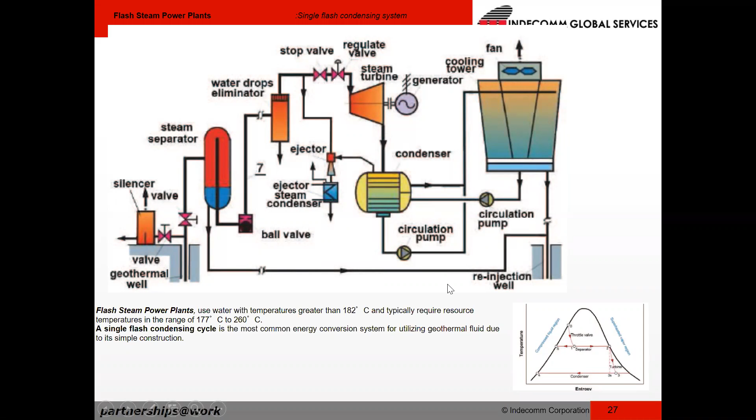Right. Now, this is another detail of the flash cycle, where you have hot water, not steam, coming from the ground. It gives you hot water. Of course, you can suck it using a pump, or it is coming at high pressure and you help it with a pump. You can make the flash in 2 steps and guarantee you have dry steam here, but you condense it back and inject it, as we said.

We have another type where, as I said, the water in the aquifer is contaminated. We know in some places the ground has some radioactive material, so maybe the water you are using is contaminated with radiation. So you can make a heat exchanger where you have the water in a closed loop. You pump it down and keep circulating, take the heat in something like the boiler or heat exchanger, and then this Rankine cycle has a closed loop of pure water, like any Rankine cycle.

Actually, if the geothermal source doesn't have temperature up to 300 degrees, which is usually the case if you only dig not very deep, you have temperature around 130 to 150 degrees. So you can use a different fluid here. Instead of water, you can use an organic fluid that boils at a lower temperature compared to water.

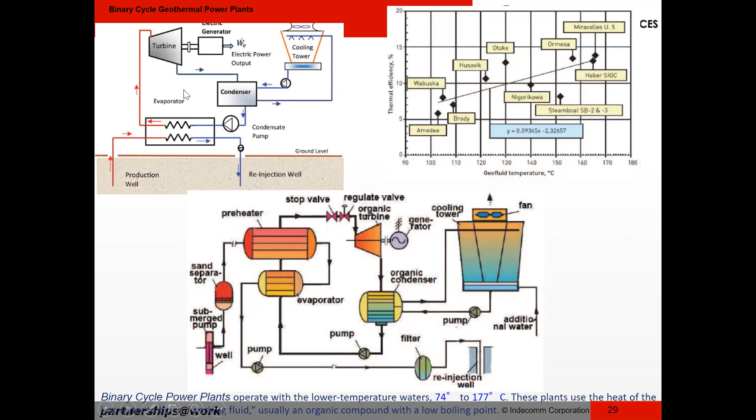And of course, we have the heat source here in the boiler or evaporator, then the turbine, then the condenser. The turbine rotates the electric generator, and the condenser we can cool by external water from the sea if we are close to the sea, or a special loop of cooling water from a cooling tower. Okay, since we introduce any fluid here, we can use a binary fluid like ammonia solution, what we call binary fluids.

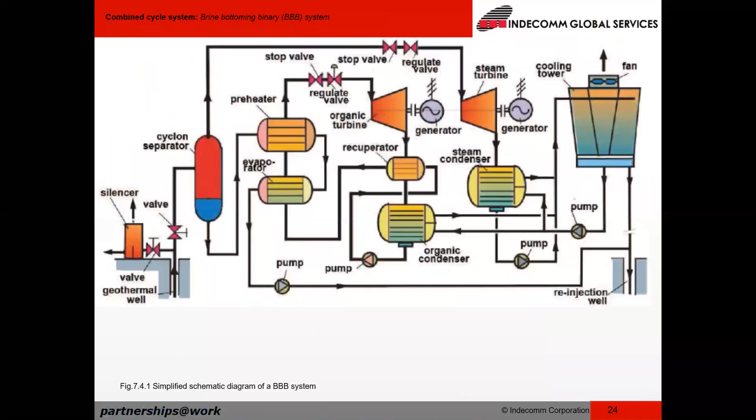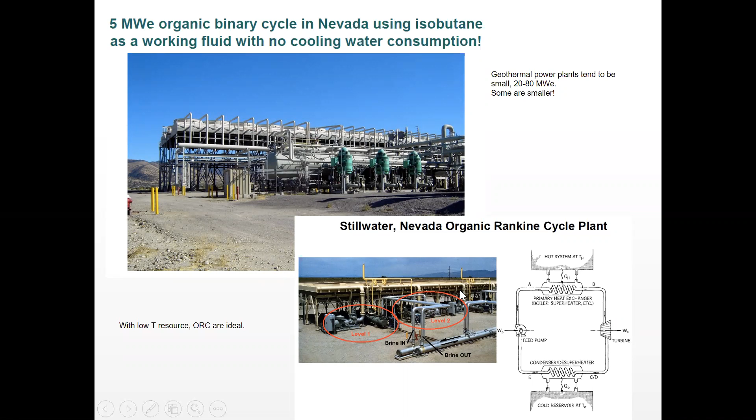There are many ways now. You can see this is a geothermal plant that has pumps that circulate the water down, and we take it to whatever heat exchanger or directly to the turbine. It depends on the nature of the water we have, but it is not a simple cycle. Like any power plant cycle, it is very complicated. This is just giving you an idea of the different technologies.

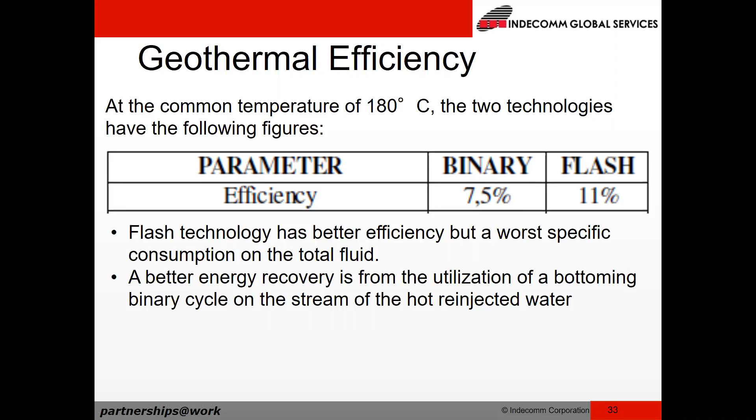Efficiency of geothermal for binary system is 7.5%, for flash evaporation about 11%. You might think this is low efficiency, but the source is free. This is the net efficiency. You take work from a free source, you don't burn fuel, you use the energy stored in the ground, but it might have a lifetime also because you are taking the heat from the ground.

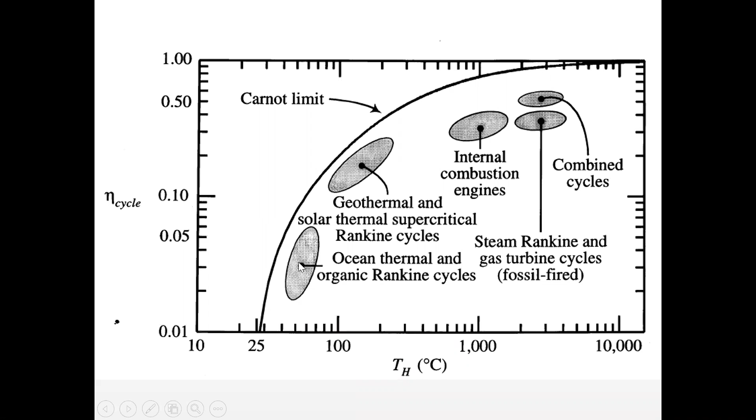Actually creating the cracks and going deep for drilling, using horizontal drilling. This technology has had a lot of development and is very costly, and people work together: people from geology, earth science, thermodynamics, and engineering - civil, mechanical, electrical. They work together to build such a plant.

Regardless of your background, each of these engineers should know what is going on in the plant and what is needed. The geology engineer should understand what the mechanical engineer needs, and the mechanical and geology engineers should understand what the electrical engineer needs, in order to design and build such a plant, all working as a team. At least each one knows the minimum required information, but each knows deeply his own major or specialty.

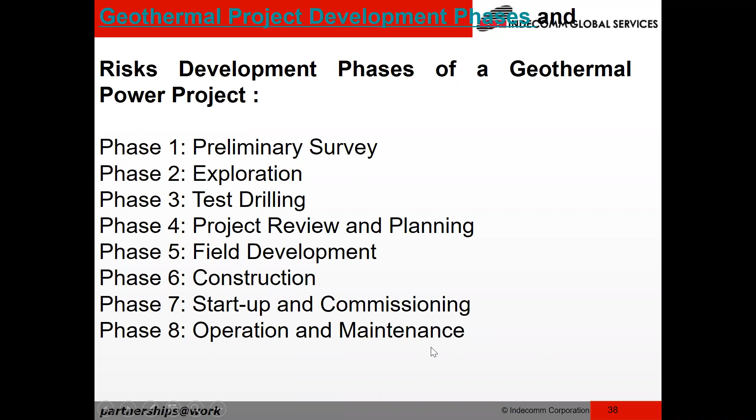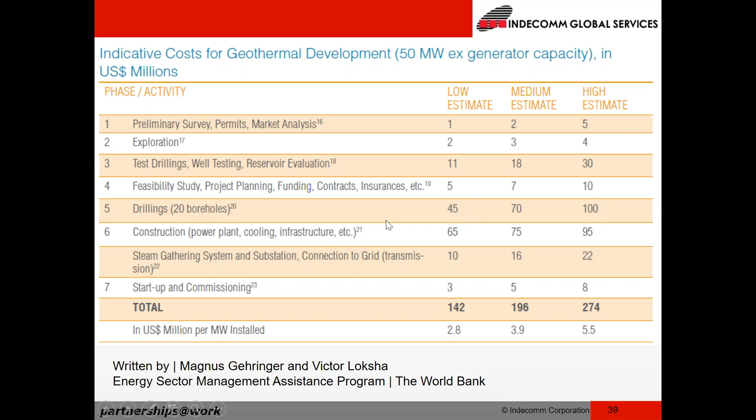This is the total installation cost for a proposed 110 megawatt geothermal plant in Indonesia. Here is how the cost is distributed: the power plant itself is 42% of the total cost, 14% for steam field development, 4% for injection well, 1% for test well, and 15% for production well.

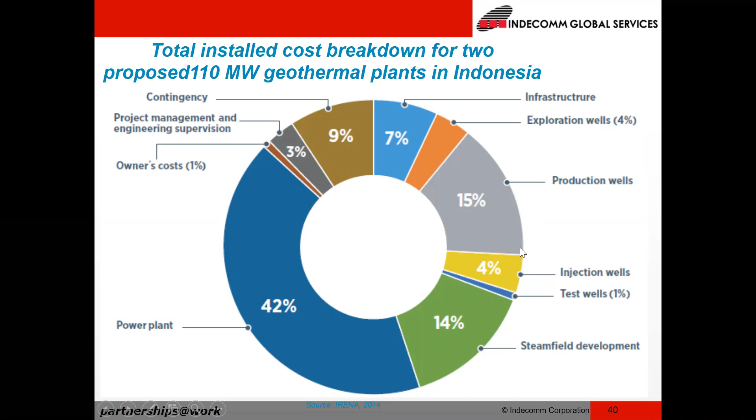Can anyone tell me why the production well is more costly than the injection well? If we inject water, it is cold, but production will always have a high temperature. So the material of the well coating and other things is different. I'll let you enjoy this.

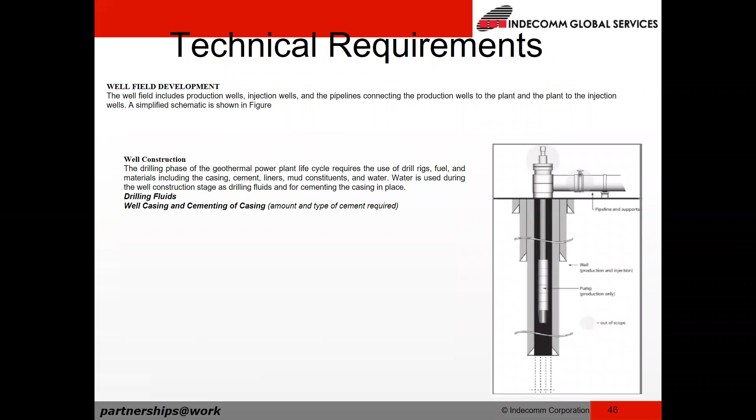I want to stop here to avoid getting you bored, and I'd like to know if you have any questions, please.